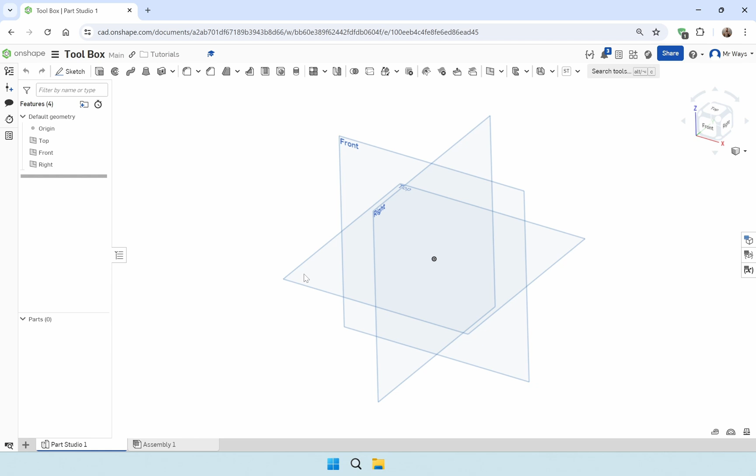Let's get rid of this, maximize this, create new document, name it toolbox. We're gonna hide the other planes for now, and start a new sketch.

For the base, we're gonna choose the center point rectangle. Go to the center, and before everything, let's check the workspace units. We want them in millimeter.

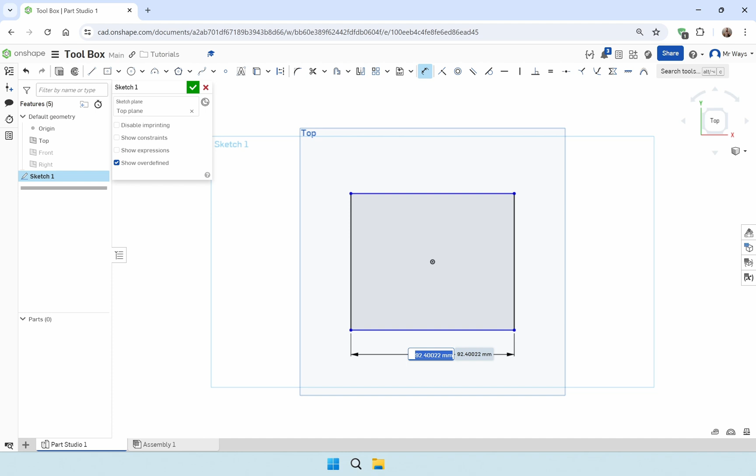So let's go back to sketch, and this is gonna be the width. So we're gonna say width, and it's gonna be 200.

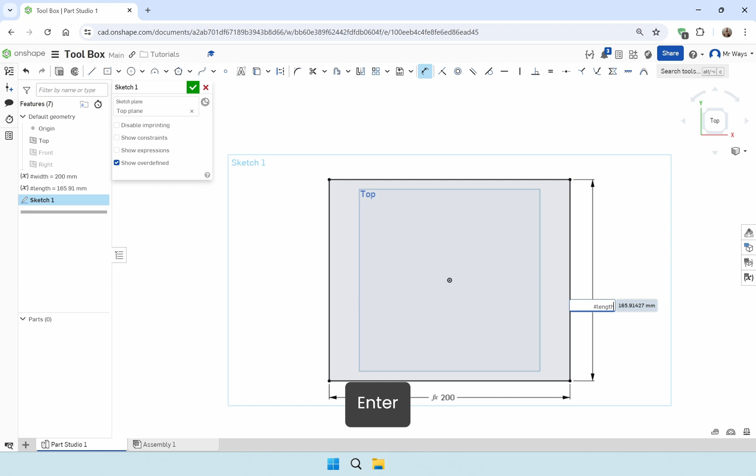This is gonna be the length. Actually, it's gonna be 300. No, actually it cannot be 300 because the build plate of my 3D printer is 256 by 256. So we're gonna say 250.

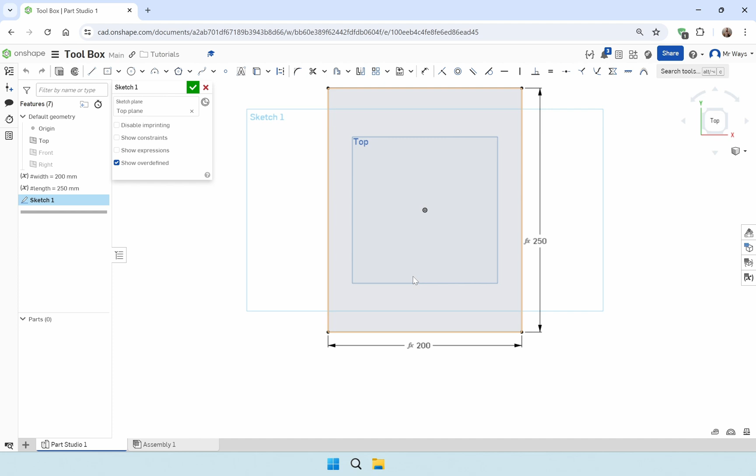That's what we need for now. Let's extrude.

This is gonna be another variable. It's gonna be height, and it's gonna be 10 centimeter or 100 millimeter.

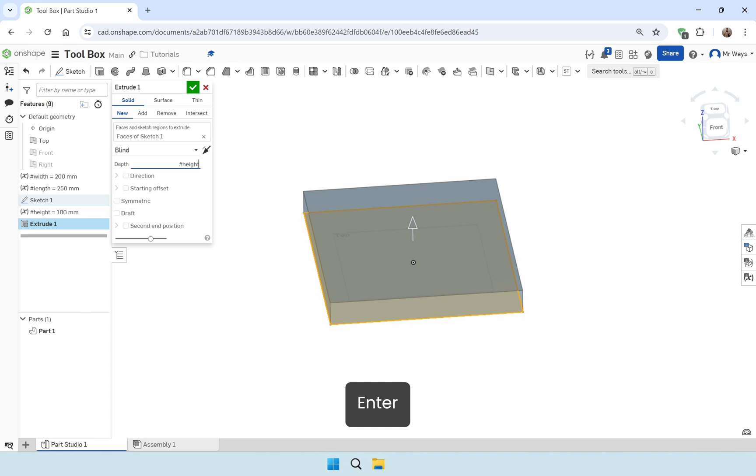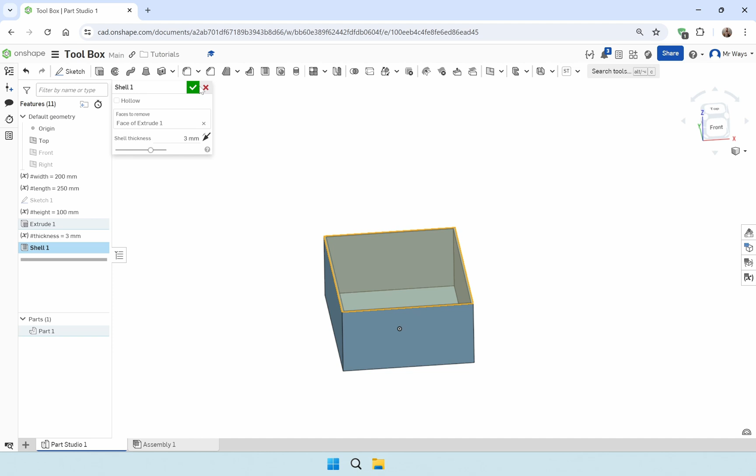So what we do after this is choose the shell feature, and let's make another variable for this. This one is going to be thickness, 3. Let's put this one, actually let's put this here.

Another thing that I want to do is choose the fillet tool. We can do that later.

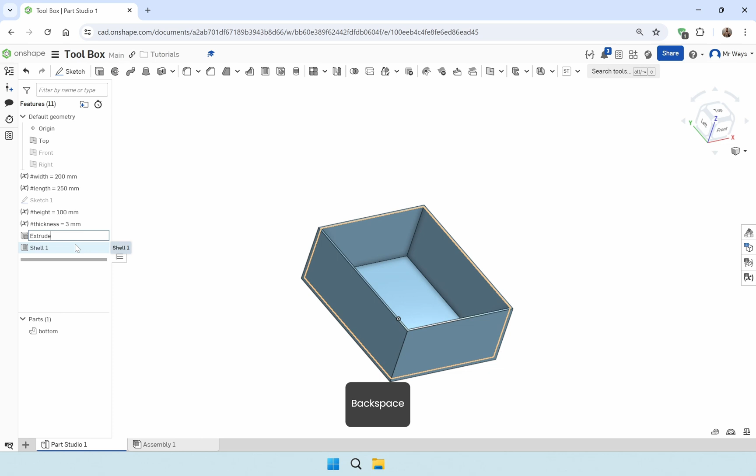Now let's go back. Actually, we can rename this - that's a good habit. Bottom. You can also rename these. Extrude. Bottom. Yeah, let's go back to our sketch.

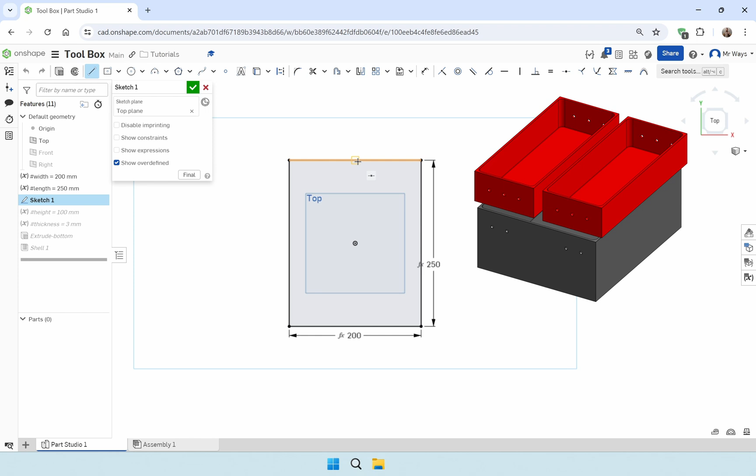Now we need to divide this big rectangle into 2 pieces, because the middle and top trays are gonna be half of the bottom plate or bottom tray. So I can do this, go here and do this, but I don't like that because when I wanna extrude and bring this and choose this and this, I want both of these parts to be separate, but it gives me only one.

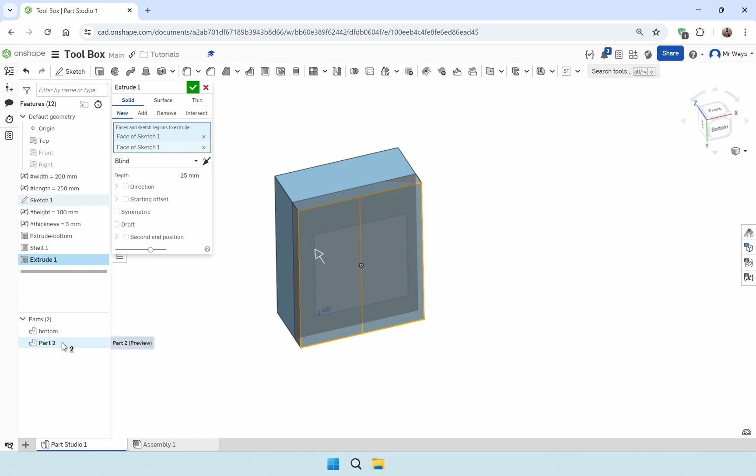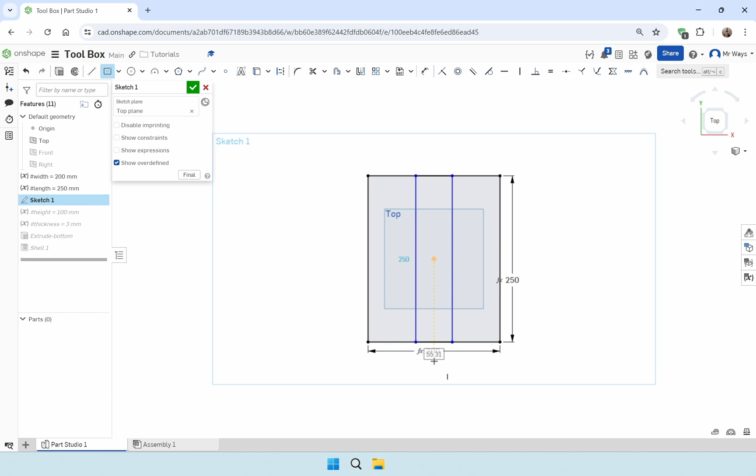So the solution for that - one of the solutions - is to get rid of this, and instead of a line, go back again and choose a center point rectangle, and choose a very small length for this, something like 0.1.

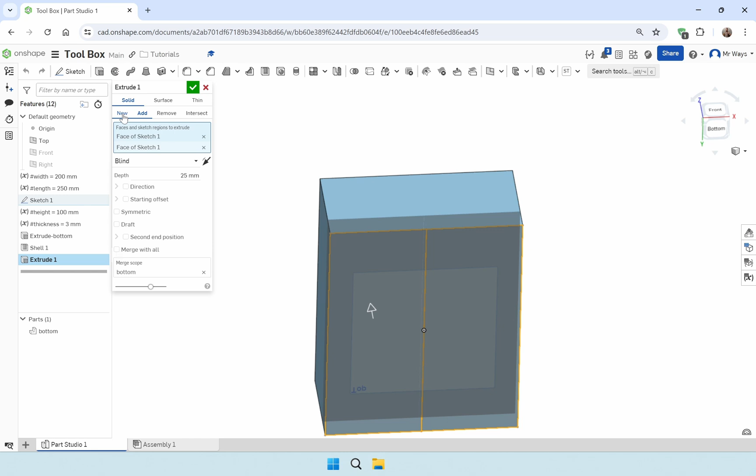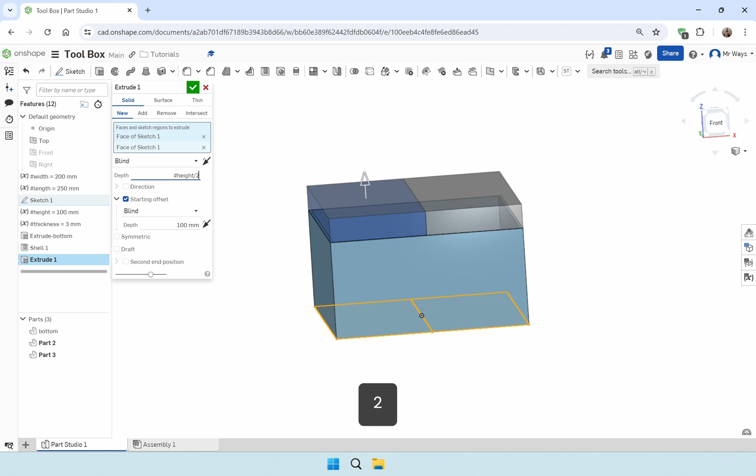And now when we go back and select these 2 faces and do the extrusion and say new, we're gonna get two new parts for those two new plates. We're gonna say there's an offset for that, and it's gonna be the height - the height of this is gonna be height divided by 2, which is 50 millimeter.

So now we have our middle trays. We can rename them again. It's gonna be middle right, and this one is gonna be middle left.

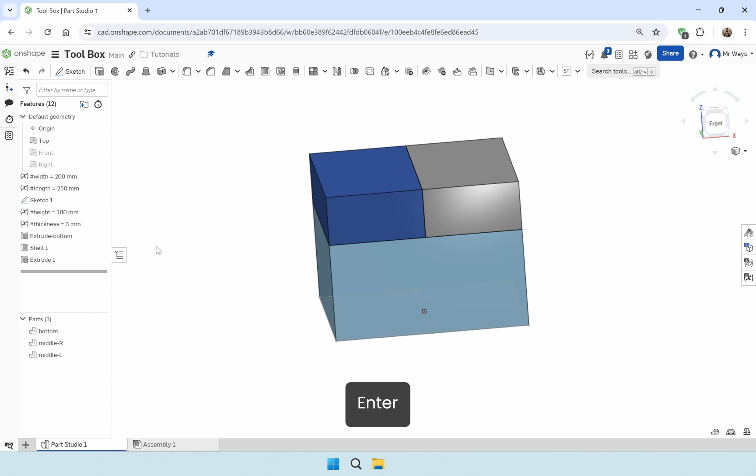Let's repeat the last steps. So we need another extrusion. We're gonna go to the bottom, choose our faces, and say it has a starting offset. So it's gonna be height plus half of the height, which is 1.5 times height.

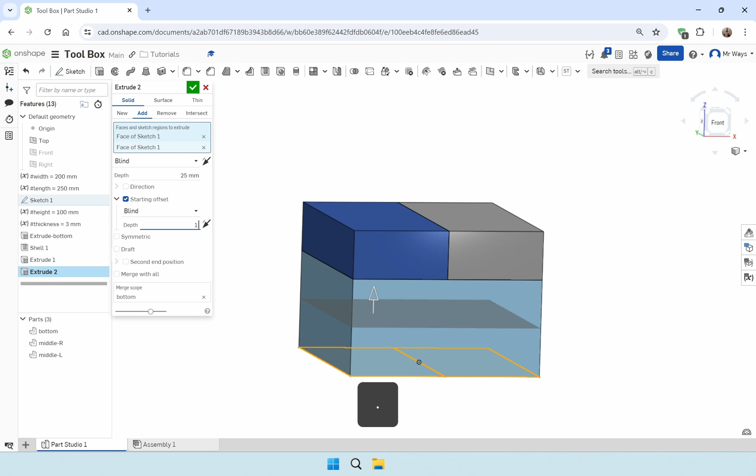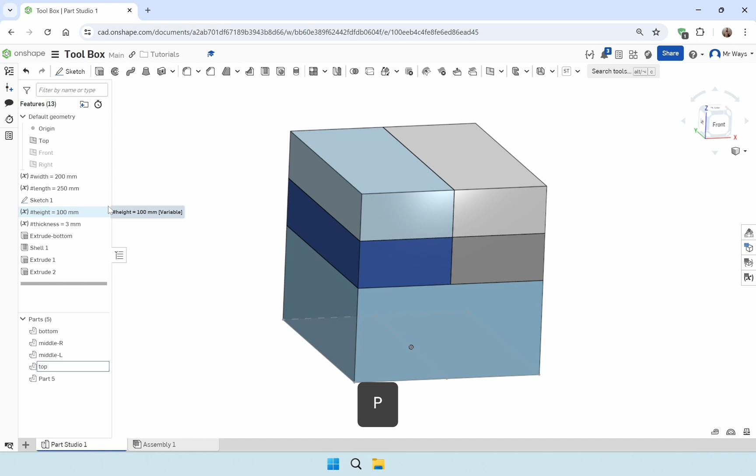Right, and again this is gonna be height divided by 2. So now we have our extrusions for the trays. Let's rename them - this is again top right, and top left.

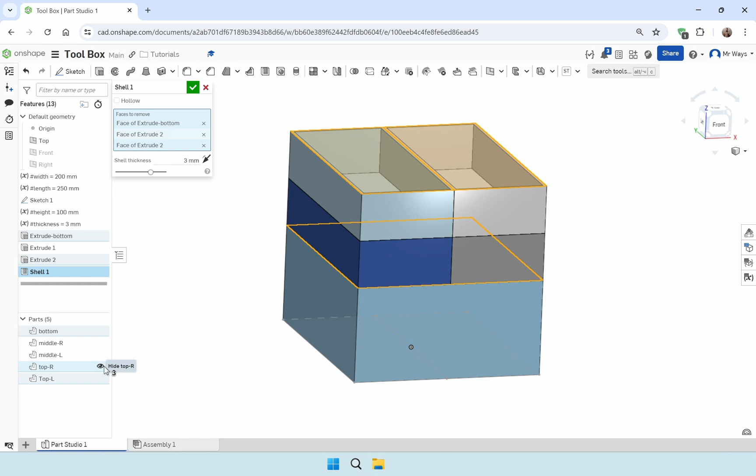Let's take this shell to the bottom so we can choose more. So now we don't need this anymore. So now we have all the 5 trays.

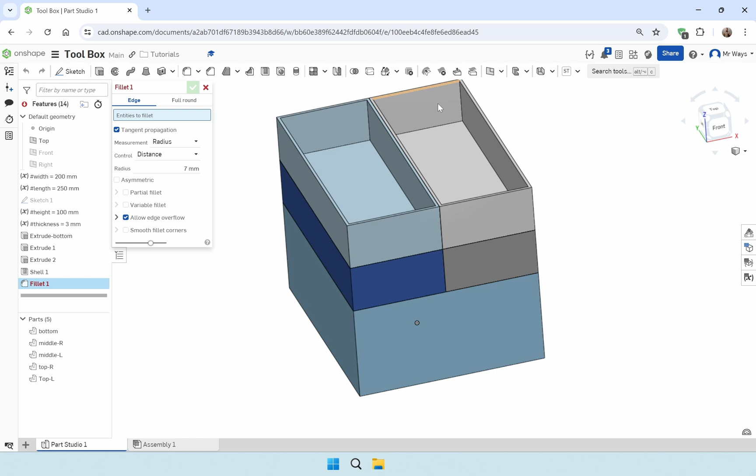Let's add a fillet feature to the corners in order to make these stronger. And it actually makes it nicer. We're gonna hide these two.

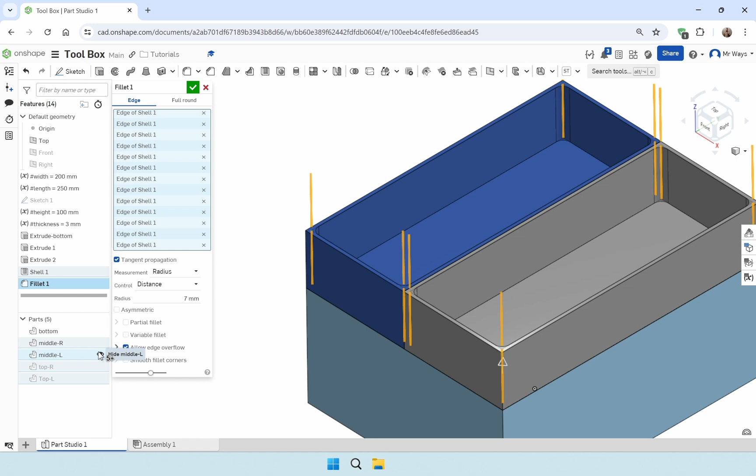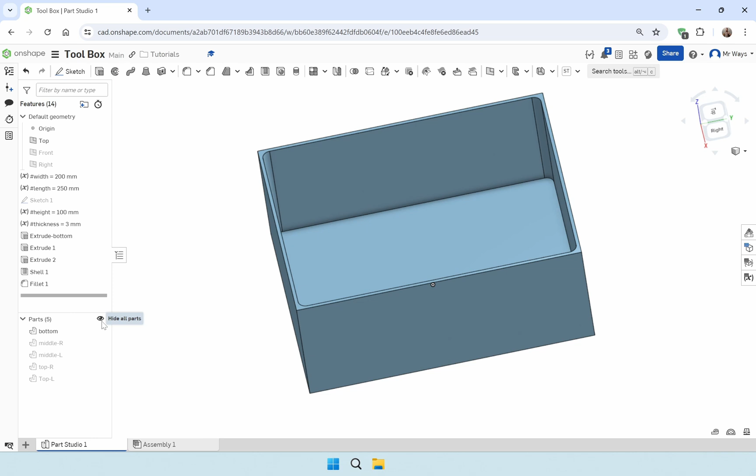And last but not least, the biggest tray. So this one, 7 - 7 looks good, so let's keep it 7. And let's show them all. And there we have our trays.

Next step is go to the front, create new sketch. We're gonna draw the holes for the hinge arms.

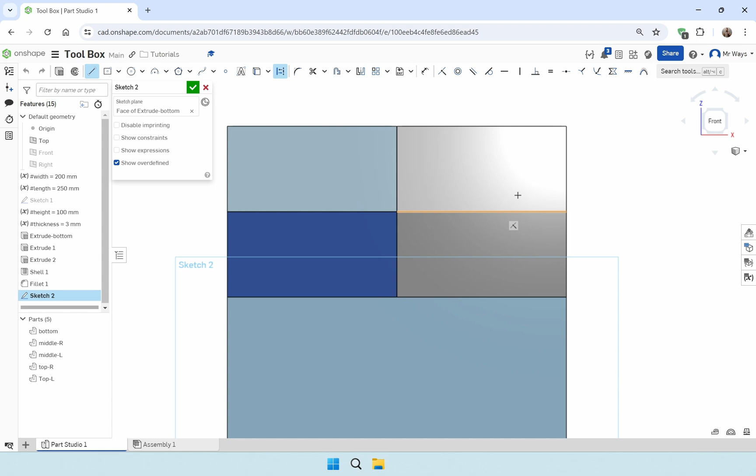So for that we need some guidelines - the middle of the trays, and another one. And the distance is, instead of typing 25, we're gonna say height divided by 4.

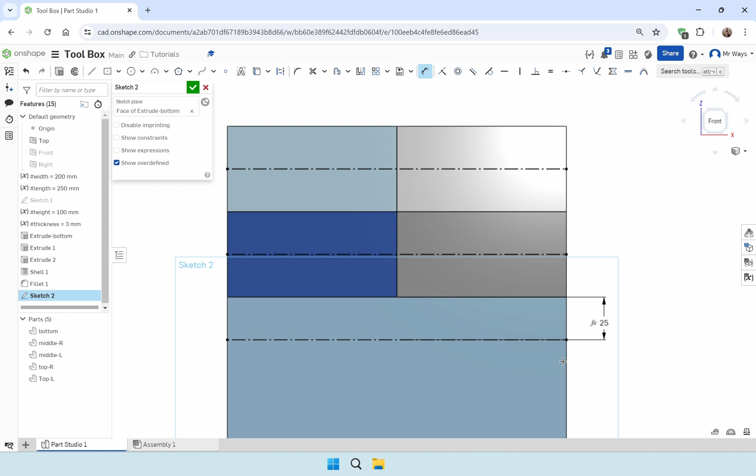Because when we're gonna change these numbers, these variables, the dimensions are gonna change and update automatically.

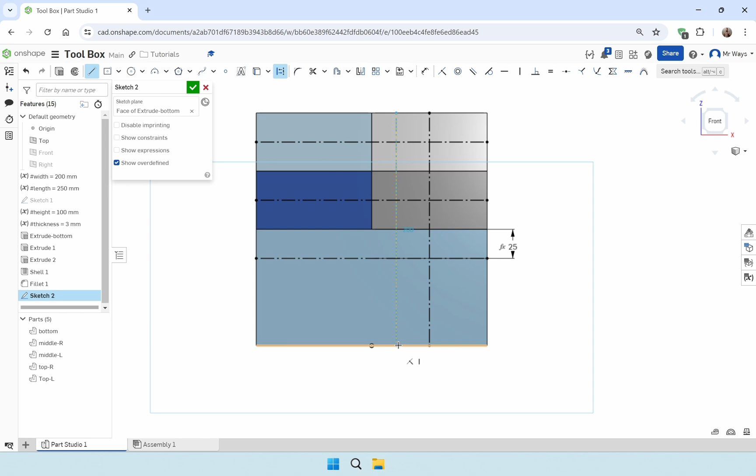Next, we need the center point of these. We're gonna continue with some more lines - another one, and the last one. Let's make sure that all of these lines are vertical and straight.

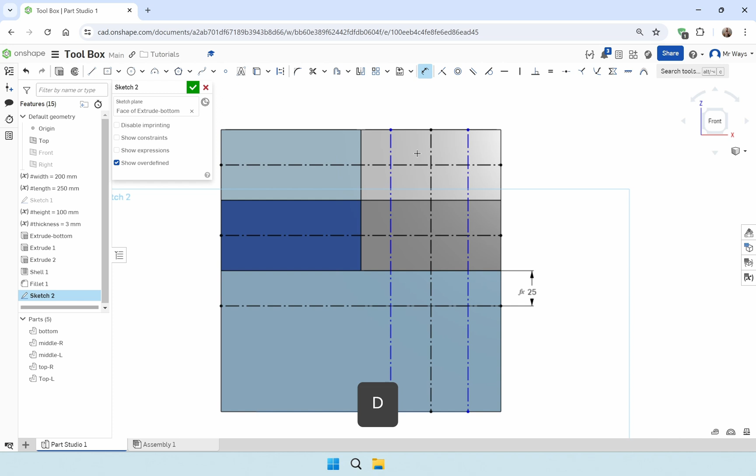So now let's make sure that the distance between these two, between this and this, are the same, and it's actually 25. We're going to say the same thing, height divided by 4. And now we have our guidelines.

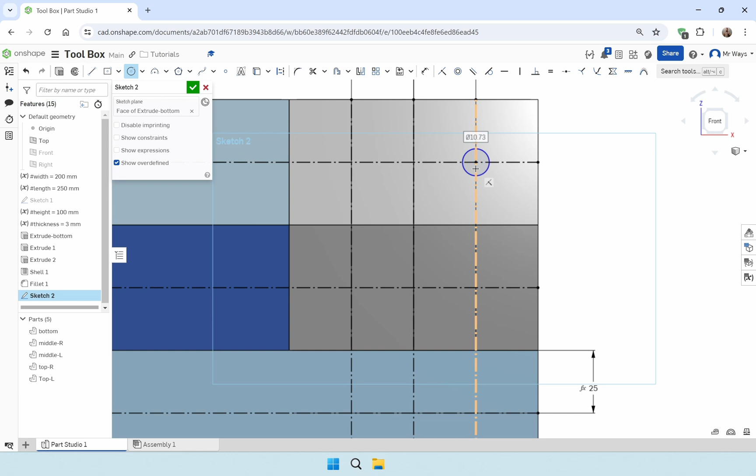And now let's draw the holes. I'm going to choose this. It's going to be 5 - let's make this one a variable too, and we're going to say it's 5.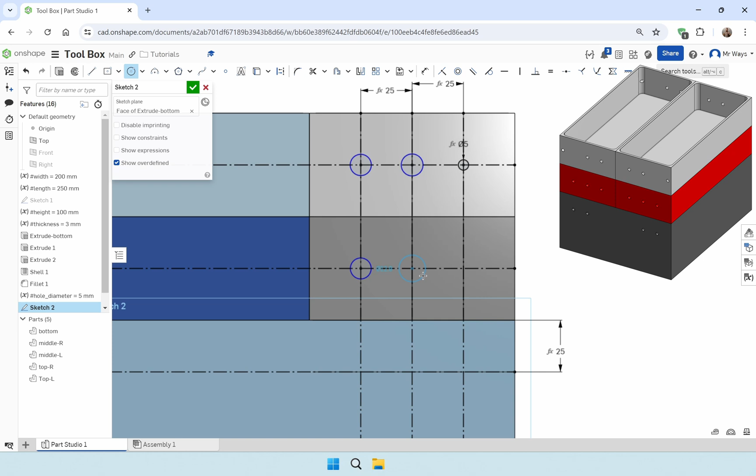Actually, we don't need a hole over there. Let's continue here - we need one over there, the other one here. For the middle trays, we need 3, and for this side, for the bottom one, we only need 2.

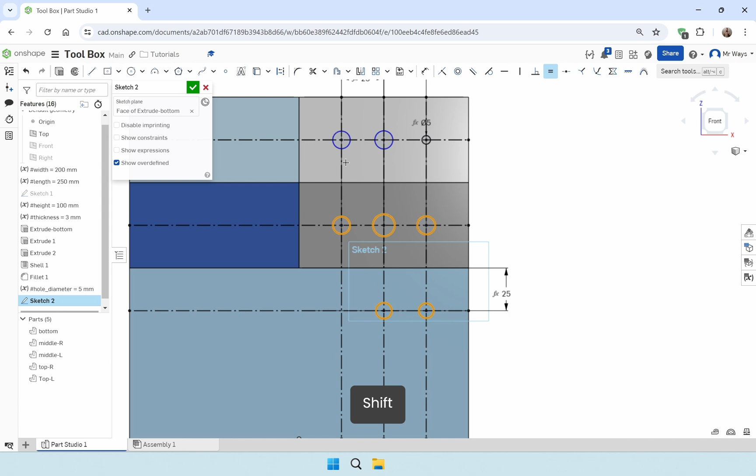So let's select all of these. Actually, let's go to equal, hold down shift and select all of these, and let go, and last click on this. So now all of them are 5.

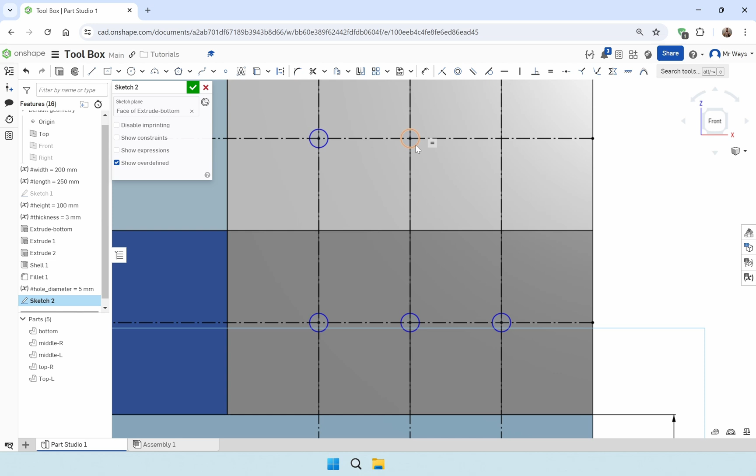We don't need this hole, we're gonna delete that. They turn blue, which is not a perfect thing, so we're gonna get our tool. 5 is good.

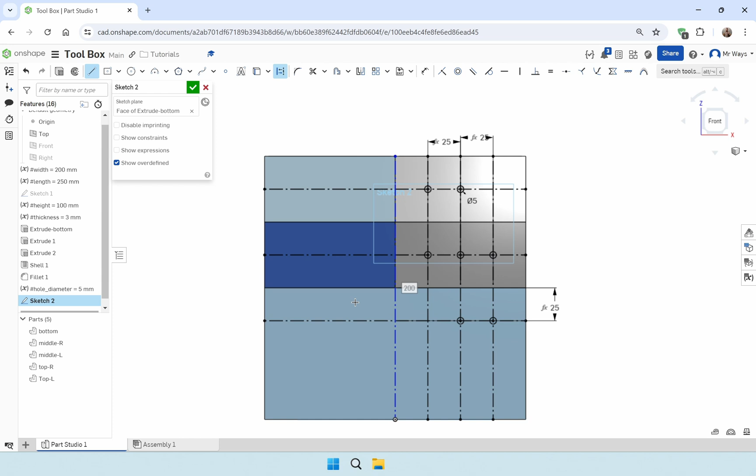Now we're gonna mirror all of these holes to the other side. So let's draw another guideline - just click and drag. Choose the mirror feature, and we're gonna select our line and then choose all of these.

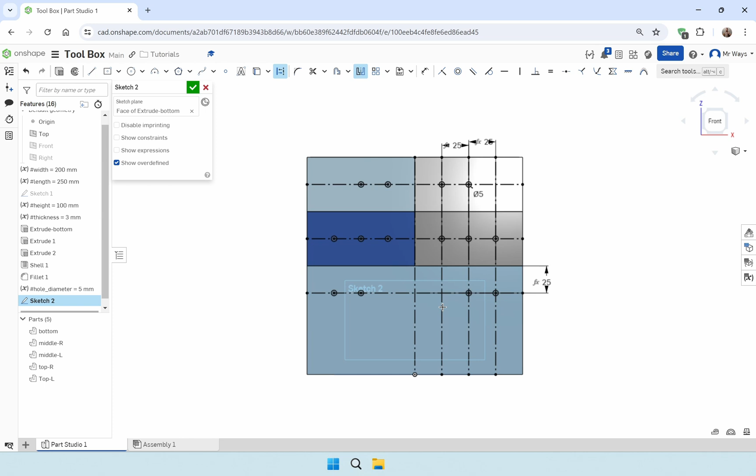Now we have our holes for the hinge arms. We can rename this sketch for the holes.

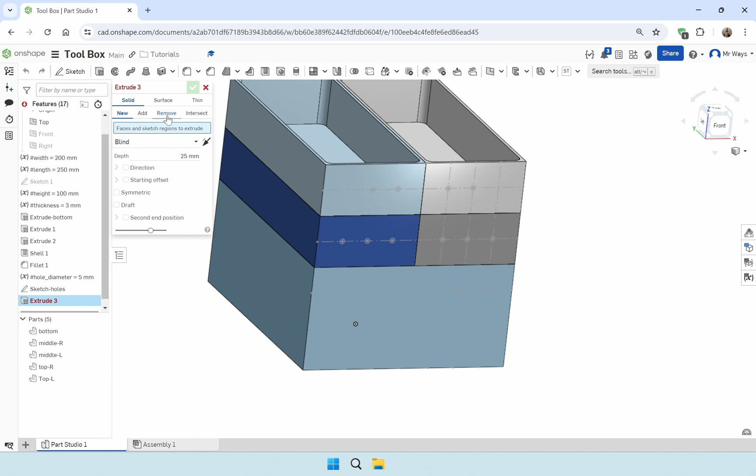We're gonna remove material, and we're gonna choose all of the holes - there's no need for us to go and choose them individually, we can just click here and we have them all. And for the merge scope, we're going to choose all of these 5 trays, and it's going to be through all.

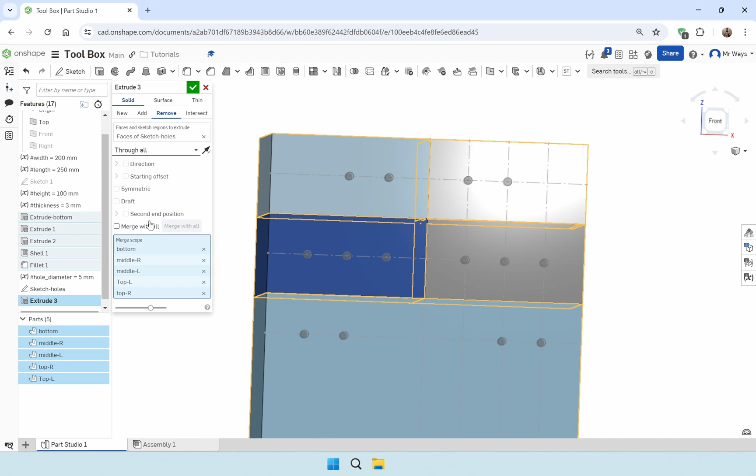And when we do that, we have our holes that goes all the way to the other side. Nice.

For the next part, we're gonna draw and make the lid and hinge arms and the other parts. Thank you for watching, and I see you guys in the next video.